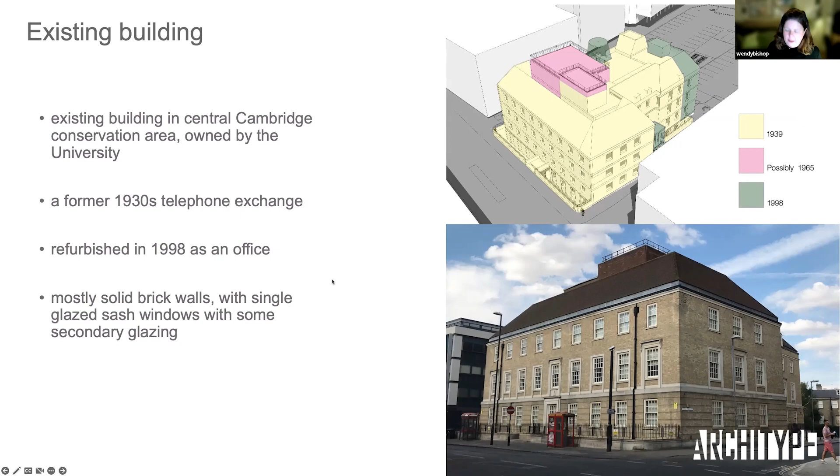And there was a refurbishment done in the late 90s where they added a small extension, which is shown in green in the top right there, and the entrance porch and possibly the escape stairs at the back. We're not entirely sure exactly what happened. And they occupied the building for about 20 years until they moved out in 2018 to their new offices. It's mostly solid brick walls, although there were some real surprises on site with single glazed sash windows with secondary glazing. And just an image of the building prior to any refurbishment going on.

I think one of the key things to note was the original, or actually they weren't original sash windows from the original 1939 build. They were rather clunky replacements from somewhere in between. With the secondary glazing and the dropped ceilings internally, it made the internal environment really quite gloomy. The overarching impression of walking around was that it really wasn't benefiting from daylight in most of the spaces.

So our brief from CISL, I mean, it was kind of a dream brief in many ways. We didn't have to convince anyone to upgrade it in any way. CISL were really clear they wanted a low carbon retrofit. It needs to be a case study for the circular economy. It should be done to Passivhaus standard, which in the case of refurbishment is obviously EnerPHit. They wanted it to be BREEAM outstanding, have low embodied carbon, showcase lots of innovations, include maximum bio-based materials, and also, and probably most importantly, to show that it could be done on a standard retrofit budget and offer value for money, because overall we wanted to show that this could be replicable in many locations.

And I'm just showing this graph to show the scale of the issue with the building. We did this within the first few weeks of the project. We had the meter readings for the last 12 months of Cambridge Assessment's occupation of the building. So the left-hand column is divided between gas and electricity. And we wanted to show the scale of change to bring it down to EnerPHit. And there's actually 3 levels of EnerPHit, EnerPHit Classic, and then another couple of levels with additional renewables added in. So there's a slight conversion factor there, the PER factor.

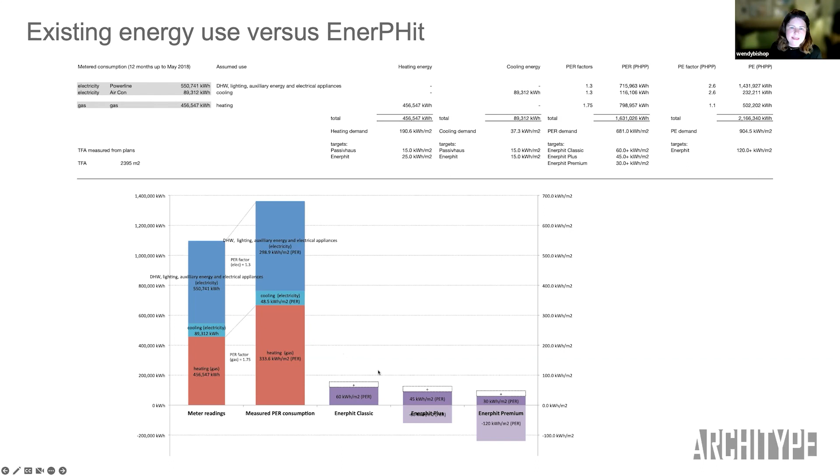So how do we start the project? This is one of our initial strategy drawings from when we were thinking about how we're going to tackle this. I've mentioned the conservation area, and obviously, although external wall insulation to upgrade the building's thermal performance would have been technically easier, we recognised right from the outset that it would have been a bit of a no-go in this context.

So we were looking at internally insulating, and that's what that red line all the way around the perimeter of the building represents. What that presents is some real challenges, actually, because with an existing building, you don't have the opportunity to construct details like structural walls coming down and meeting the lowest ground floor in a thermally efficient way. So we always knew we were going to have to tackle quite a number of thermal bridges,

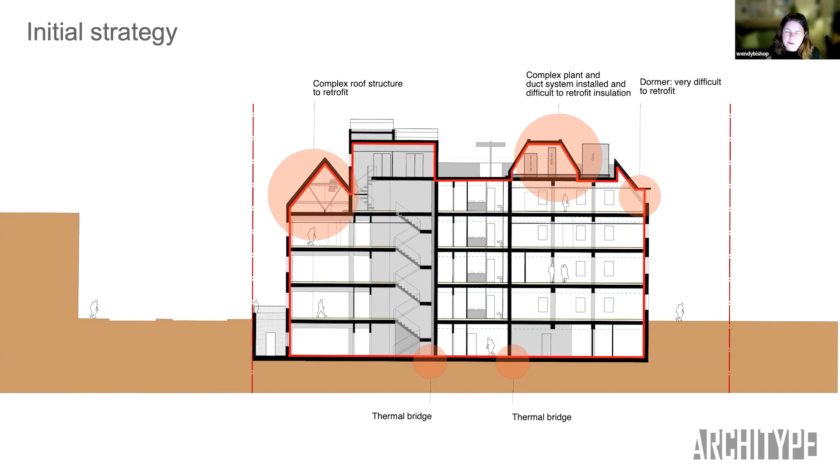both where walls met the lowest floor, also where every intermediate floor met the external walls, and also a lot of challenges around the very complicated roof line. So we were also looking at trying to simplify that roof line as much as possible in what we did.

And then another couple of sketches from that early stage, just elaborating on those principles. So the existing situation is illustrated in that top section, a typical floor plate with those lowered ceilings that I flagged up in the photo, which concealed a number of air conditioning units. We had a raised access floor that we would obviously go on to retain.

But looking at that proposed section at the bottom of the sheet, this shows that strategy of the internal wall insulation, and where we were going to be meeting intermediate floors, we knew we were going to need to wrap things around both above and below that to minimise the thermal bridge. And then when we came to the windows, we knew we need to upgrade those probably to a triple glazed window to meet the thermal comfort requirements of EnerPHit.

But in doing so, as well as changing the windows, we knew we would want to move them back in the facade so that they were ideally in line with that internal wall insulation. So we had as simple a detail as possible and continuity around the building. If we were to keep them out in their original position, we'd have had a very complicated detail at every single window to push the insulation and airtightness line out and then come back in again. So that was really a key change as well.

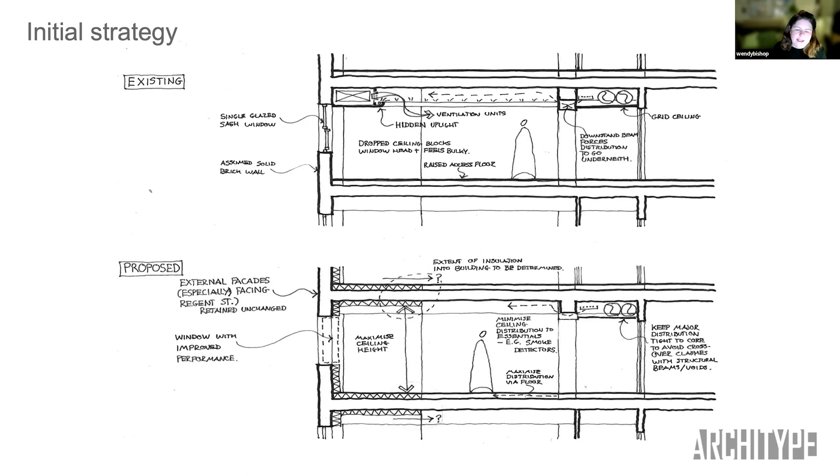And we had an initial meeting with the planners at quite an early stage to talk about the proposals for the building. And obviously, with the internal wall insulation, there was relatively little change externally. The big thing was to the windows, where we were proposing removing the sash windows and replacing them with windows without any subdivisions, mullions, transoms. So something like on the right-hand side, and planners flagged their concern at that stage that that was going to be a potentially contentious issue in this context because of the conservation area.

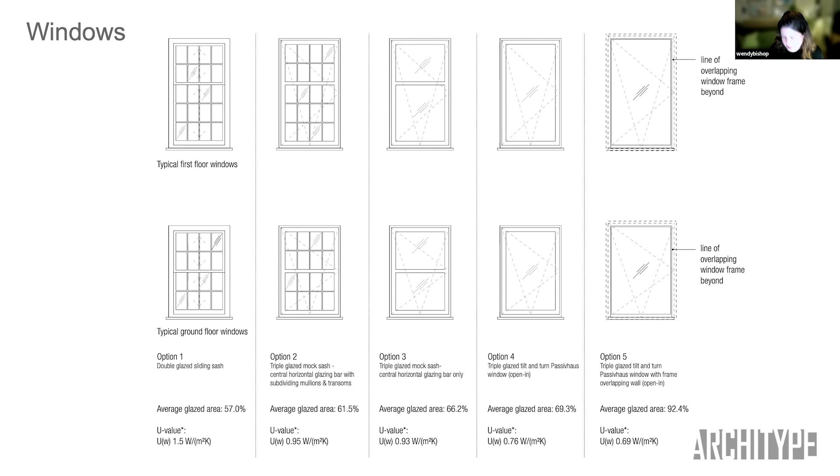So we spent a lot of time looking at this in detail through the early design stages. We looked at lots of different options, this illustrating a range of options that we looked at. And we tested those in different ways. So apologies for the slight graininess of that slide. In terms of the heating demand, obviously, as we moved from, I think it was a double glazed option for option one, all the rest are triple glazed.

But the thermal performance of glass is far better than the thermal performance of even a thermally broken window frame. So the less frame, the better the thermal performance. But several of those options could have met the EnerPHit criteria. But what really shocked us in a way was the impact on the daylight factor of removing all the sash bars and just maximising the amount of glass, and that massively increased the daylight getting into the building.

Despite that, and this was modelling that BDP did of the building with the different window options, even with the best possible windows with recessed frames and maximum glass, we still wouldn't have been able to achieve any BREEAM credits for daylighting because the daylight factor was still relatively poor. And I think it's probably an indication that because the building was built as a telephone exchange, daylight was never high on anyone's priority at that point in time. And so if we were going to radically change it, we would have had to start knocking new windows in the facade, which again wasn't really an option in this context.

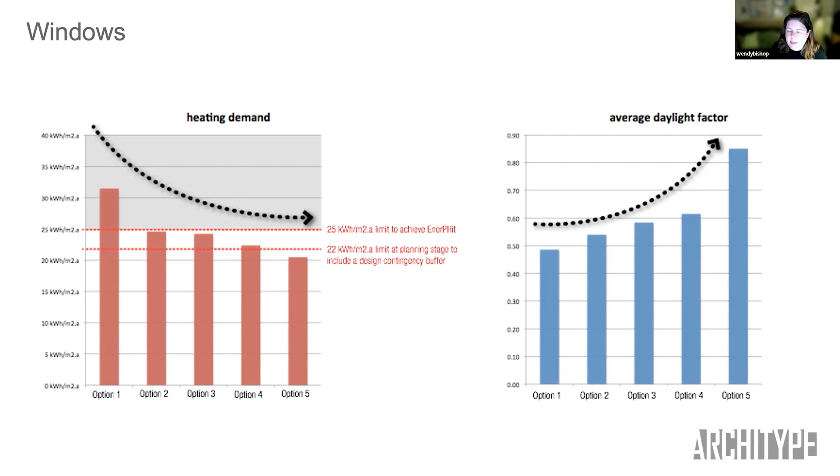So we put all these arguments to the planners, and fortunately they accepted it on grounds of sustainability. So although it was seen as being detrimental to the conservation area, the positive benefits to sustainability of making this change were felt to win out. Just some examples of the drawings that we did as part of that planning application to show that change.

Obviously, we can still open windows, particularly in mid-season conditions, but there'll be times in the winter as well as in the height of summer where we'll probably want to keep those windows closed to maintain comfort levels internally. Obviously, we had removed all the false ceilings from the building to maximise ceiling height and maximise daylight. And we were looking to cover those with an absorbent finish so that we were dealing with some of those acoustics within more open plan spaces.

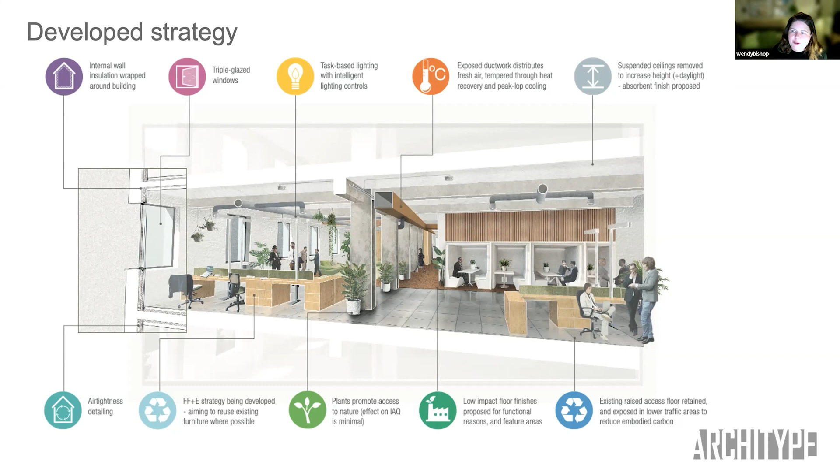And another key issue, which I think I've got a couple more slides on, is the floor finishes. So I talked about the raised access floor. Obviously, we kept that in the building. It was very useful to distribute power and data below the floor, but it also became a question about what should we finish the floor with. Actually, I'll come back to that in a second.

Just a quick one about this diagram around the circular economy, just to try and summarize the thinking around the building, because we'd seen lots of diagrams showing the completed circle around the circular economy, thinking about it from a material perspective. But this was trying to think about it from a building perspective or a project perspective. We have the existing building, of which we're retaining quite a significant chunk, obviously all the existing structure, and repurposing that where possible. So maximising that retained amount was really key.

Obviously, there were certain things we did need to remove from the building, like windows, partitions, and some of the floor finishes. And it was about trying to remove those as circularly as possible. So ideally, sending them off to be reused, I'm sure Peter will touch on that in a minute, or recycled if they couldn't be reused, and absolutely minimal materials being landfilled. And any new materials that we needed to bring in, and obviously there were quite a few of those, again, prioritising reuse, or if that wasn't available, recycled materials over any virgin materials as much as possible.

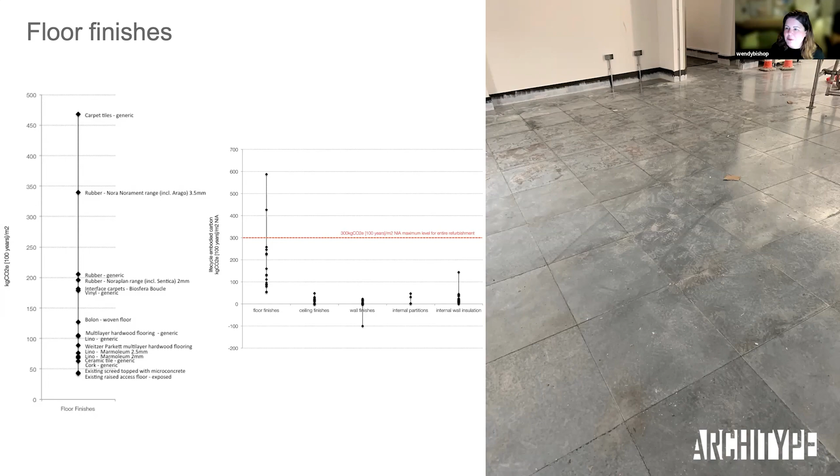Obviously within areas like toilets and kitchens, we have a different finish that's a bit more functional for those areas. But in some ways, doing the best thing here was actually to do nothing and try and just use what we had.

And then just to sum up, with some of the stats for the building, the embodied carbon assessment that we did at the end of the project to summarize what the building actually does. This is slightly different to others because we've assessed over a 100-year design life rather than a 60-year design life. So the in-use carbon is possibly slightly high. But obviously it's an existing building, we retained a lot of structure, so the upfront carbon is great. Over the whole life, it is higher than our original 300 kilogram CO2e per square metre target, but it was absolutely minimised.

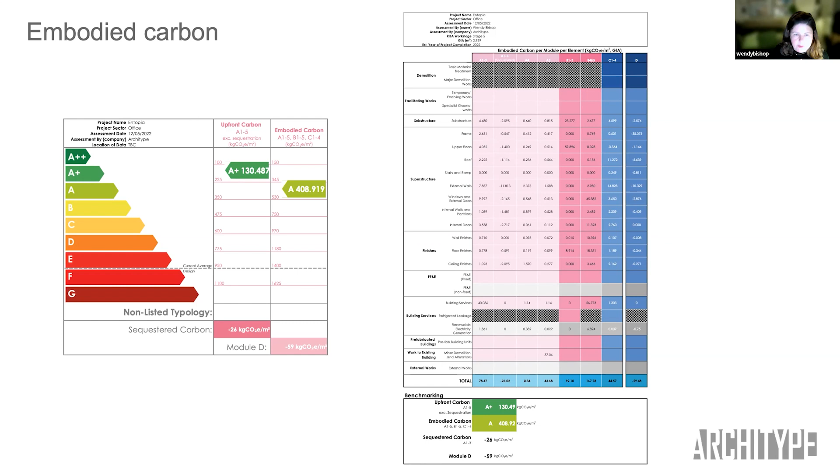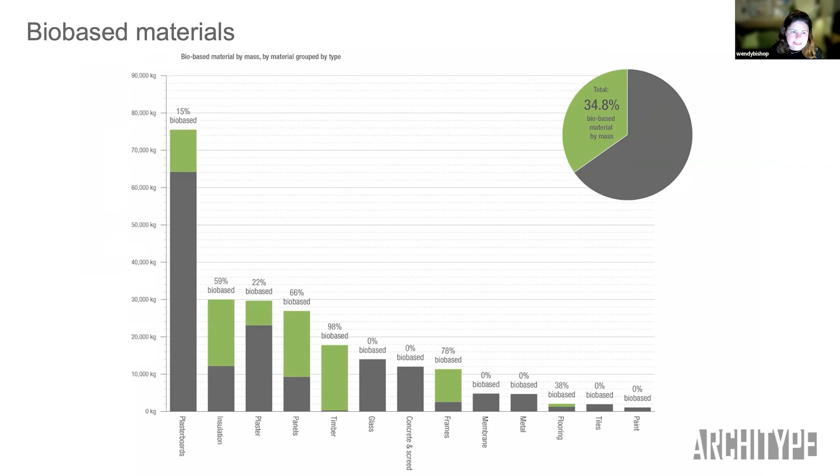We were set a target at the beginning of 70% bio-based materials, and this was really interesting because even when we initially looked at it, we realised it was going to be a very difficult percentage to meet, partly because it is a refurbishment rather than a new build. In a new build, you might have the opportunity to include a lot of structural timber, lots of mass to really increase that percentage, but in a refurb, we're quite limited in terms of the types of materials we're bringing in, and things like a window, although we have aluminium and timber composite window frames, the glass is always going to be non-bio-based. So we ended up with a total of about 35% bio-based by mass.

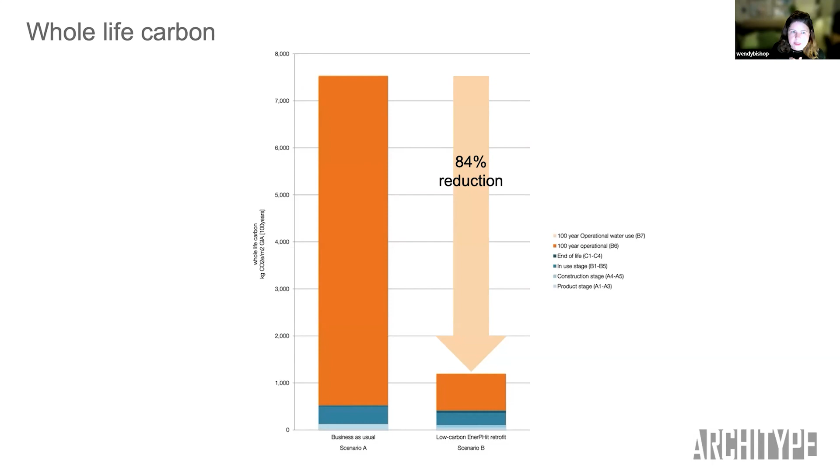And in terms of the whole life carbon, going back to that first graph, compared to a business as usual scenario with just a bog standard retrofit with no real energy saving measures, we've managed to save, we think, in excess of 80% whole life carbon, primarily through the reduction in operational energy, through achieving EnerPHit Classic, but also minimising the embodied carbon. And that's me. So I'll hand over to Lucy.

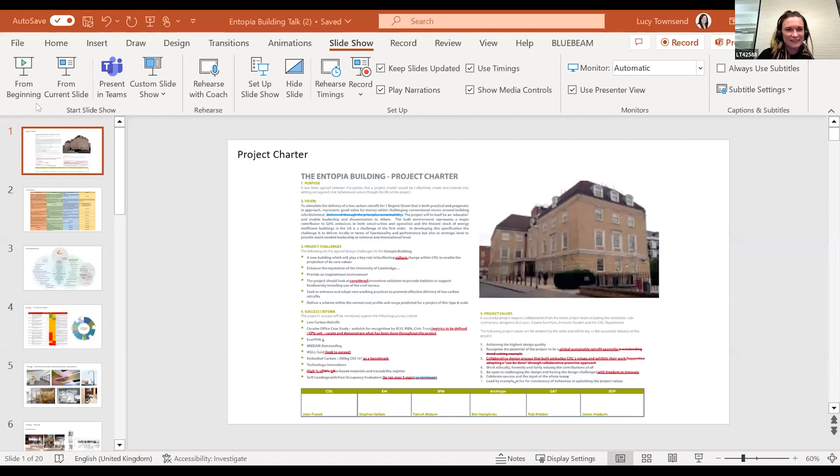Right, thanks, Wendy. So I'm just going to talk a bit more about the holistic sustainability approach that we took on the project, as well as the certifications. As Wendy mentioned, there was a very challenging sustainability brief, and as part of that, we were going for WELL and BREEAM certification, as well as EnerPHit. So I thought it was worth starting with this project charter that we had for the project. We know that we had all those brief requirements.

This was about bringing together all of the ambitions and aspirations for the project, and almost saying, okay, what does good look like? What is the success criteria we're going to be assessing this project on, but also not just about those outcomes, but about the process of how we get there. Right from the start, it was very important as a team, as well as for the client, that everyone worked together collaboratively on this project. And as part of that, we all signed up to this project charter.

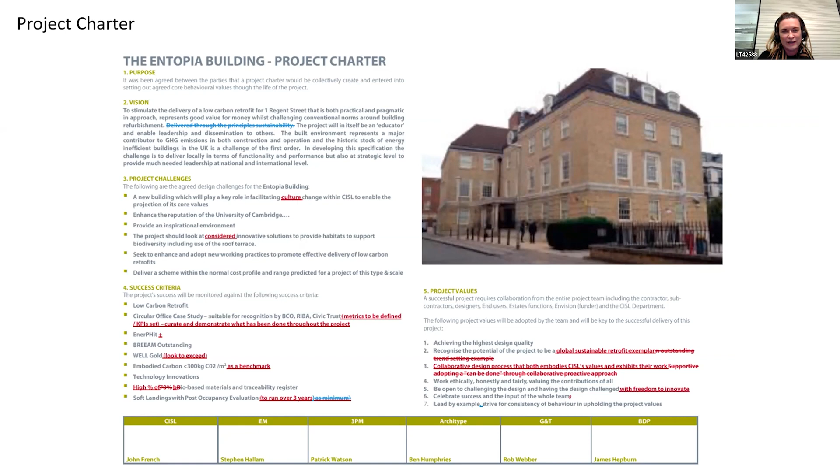So as you can see at the bottom there, that was all the different members of the team that were there from day one, and the leads of those teams all signed up to say, yes, we are all committed as a team, project team and client team, to deliver these ambitions for the project, which was, I think, really good, and just set ourselves in good stead to make sure we delivered on what we were trying to do.

And so just touching a bit on the certification. So as I said at the beginning, when we were discussing setting the brief, we talked about, okay, we don't just want to do some kind of tick box exercises when it comes to these certifications, but we did want a way of being able to measure the performance of this building. As Wendy said, we wanted this to be replicable, and we wanted this to be a blueprint for other projects. So to do that, we wanted to be able to measure the performance and actually have a badge that said that we had achieved something really good.

So we looked at BREEAM because obviously there would be a planning requirement, and it's just something that's well known in the UK as an environmental assessment methodology. WELL was probably still fairly new when we started talking about this 3 or 4 years ago, but it was growing in prominence for especially office developments. So that was all about focusing on the health and well-being of the occupants within the building, and that actually aligned quite well with EnerPHit, because that's not just about low energy. That's also about providing exemplar comfort for the users of that building.

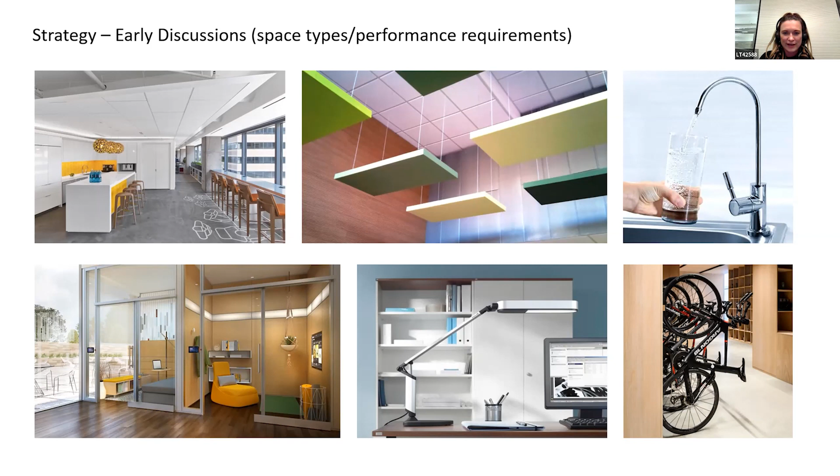And then I won't go too much into detail of this. This was kind of picking up on Wendy's point. So materiality was a really big part of the design decisions that we were making. And that was because from an embodied carbon point of view, for the fit out element, because obviously the majority of the structure and facade was getting retained, the materials that were going in as part of the fit out were a massive contributor to the embodied carbon in terms of proportion and percentage.

So it was really about how we can look at maximising the use of low embodied carbon materials, but also looking at, do we need these materials? Where can we actually omit materials? Because that is the best way of reducing your embodied carbon, by just not having any of those materials in there.

And this is something that I think over the lifespan of the project, it's been really good to see just what different materials are out there. And this is one that we've used, especially at BDP, on future projects, of going, oh, actually, I think we looked at this on CISL. In 3 years, has it been tested on other projects?

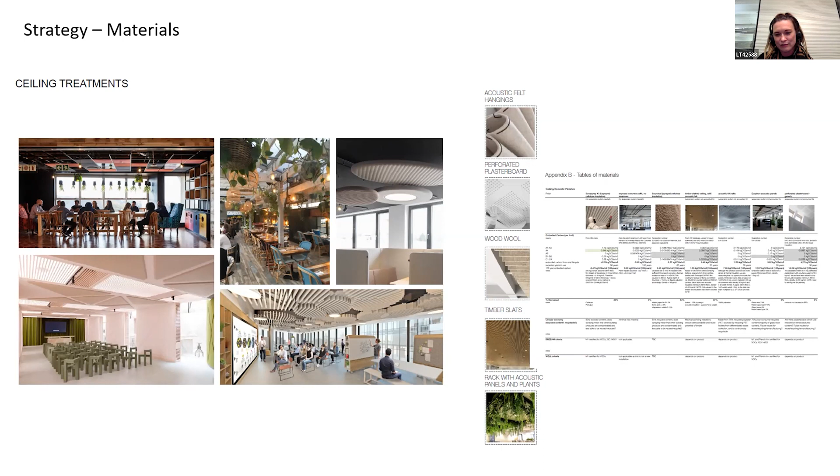Cost was a big thing as well, because if you're using materials that aren't necessarily typical construction materials, they tend to have a higher cost. So it's just looking at where the industry is evolving, and there's lots of databases now coming online with low embodied or high bio-based material options that architects and interior designers can start to use.

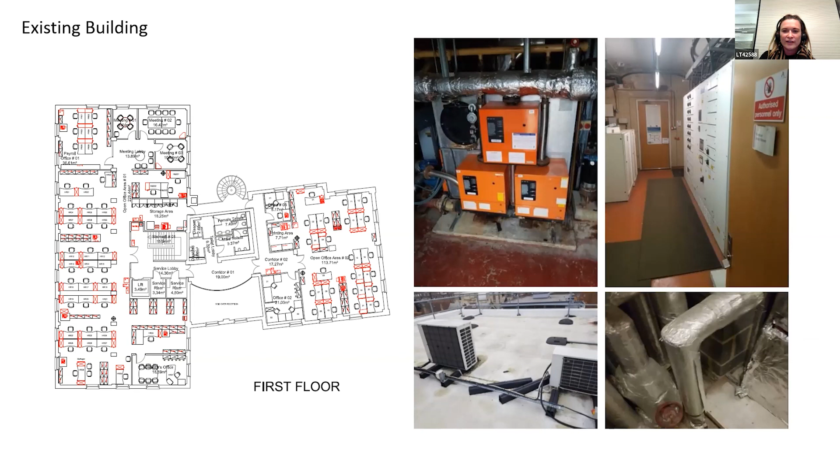And then just touching a bit on the services as well, because I know Wendy was talking a lot about the architecture. So one of the things we did was look at the existing building in terms of what kind of kit was in there and what was the existing engineering strategy. So we did walkarounds of the building to have a look at that. And then we started to look at, okay, is there anything we can actually reuse?

So just like the floor finishes, are there any bits of engineering kit in there? Because, as I mentioned before, the structure and facade were getting retained, the fit out materials, but then also the MEP was quite a large embodied carbon factor, because we were changing the heating and cooling strategy, and that obviously required new kit going in.

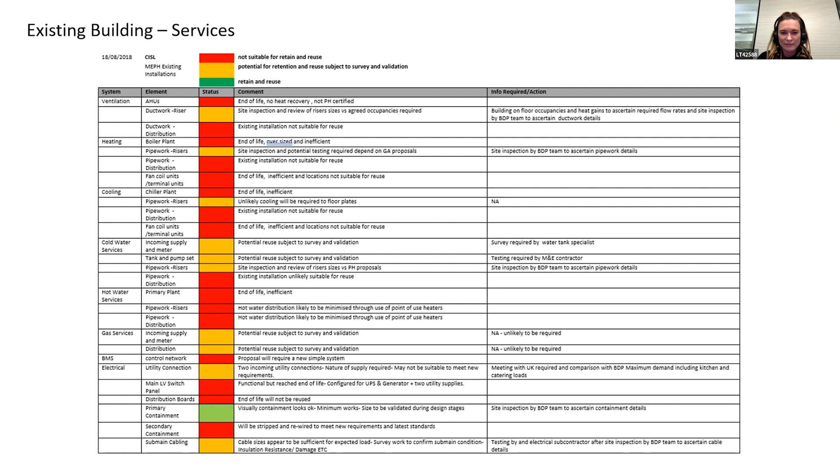So we just started to look at, is there anything that there's potential for retention and reuse, or looking around and going, actually, yes, we could definitely reuse that in the existing building so that we wouldn't have to go for a new high carbon option.

And then one of the brief requirements was decarbonising, so taking out the requirement for gas within this building, so having an all electric building. And this was where the engineering and the architectural strategies really needed to be intertwined, because it was all about, okay, if we create a thermally efficient and airtight building, that means using an air source heat pump strategy would be a lot more effective, and that would allow us to have this all electric strategy and have no combustion on site.

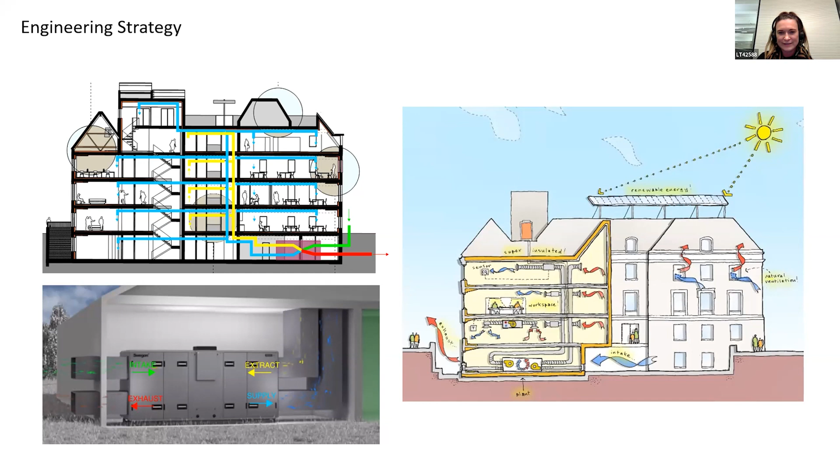We also looked in quite some detail at the thermal comfort. So one of the aspects of driving down the energy demand was looking at, can we bring in natural ventilation and cooling where possible? So this was about what times of the year. We did lots of modelling and studies to look at what times of the year the windows could be open, knowing that probably in the peak summer months there would need to be some elements of cooling, but it was almost trying to just eke out and maximise the amount of time you could get some of that natural cooling into the building.

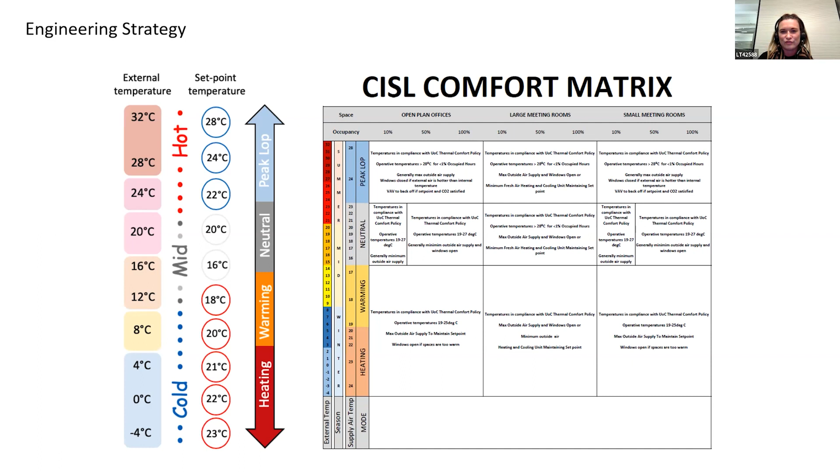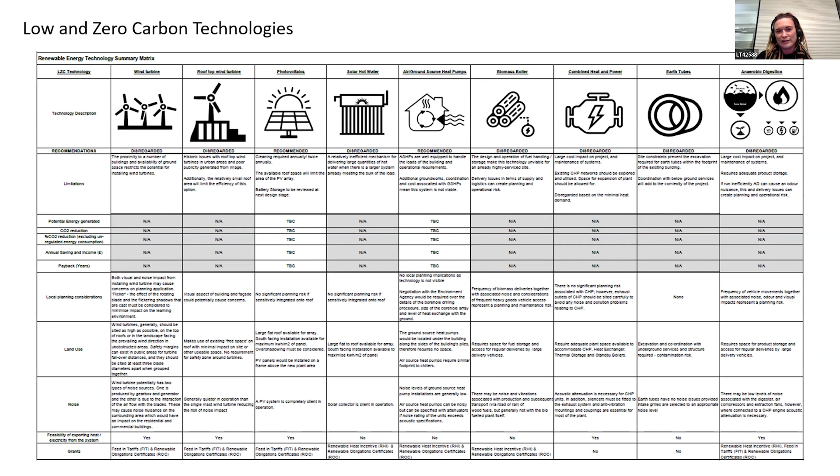And then supplementing the air source heat pumps, we wanted to look at, were there other technologies we could look at from a low and zero carbon perspective? So having available roof space was really important, and CISL wanted to have a usable roof terrace for entertaining and events. But what we were able to do was create a PV canopy structure, because we said, well, actually, it seems a waste to have that roof that you can't then generate some electricity from. So we did also look at putting PV, which was in the final building, and that just then helped to generate some additional renewable technologies on top of the fact it was already a low energy demand building from the EnerPHit certification.

And then, we had that project charter at the start, but it was making sure that this thread of high sustainability aspirations continued all the way through, not just the design, but then didn't get lost in the tender process and through to the contractor as well. So we had a great contractor team with ISG, and we made sure that as part of the employer's requirements and tender documents, all of these sustainability requirements were captured, so that ISG were given a footing of what was expected from the project, and making sure that things weren't changed from that design process or value engineered out, so that we could maintain that high aspiration.

And then just finally, on the outcomes, we have achieved BREEAM Outstanding at design stage. We are just looking at completing the post-construction stage, but it's on track for BREEAM Outstanding. And as part of that, we did get an innovation point for circular economy, which Peter Kelly will talk more about, which was really good, because the BRE don't tend to give out innovation points very lightly. We're also on track for WELL as well. So we are just finalising testing and getting the last bits of documentation together for that.

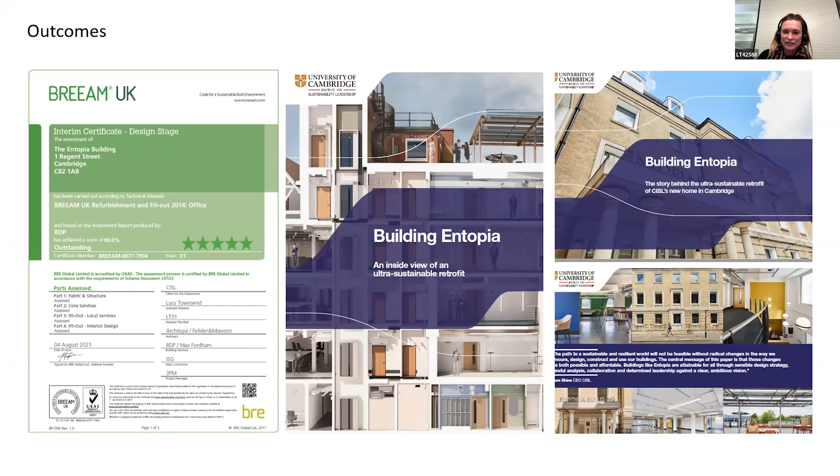And then these two images, the two right images, are the Entopia case study. So everyone within the team and within CISL have produced a summary document and a more detailed document that talks about the process we went through, some of the key achievements for the project, as well as some of the challenges. So if you can share the link, it's definitely worth a read if you haven't seen that case study.

And then just finally, the highlight for me for the project. So the now King Charles, who was Prince at the time, kindly came and looked around the building and officially opened the building. So this was me just talking him through what the aspirations were and what we did. He did have a couple of comments on the floor finish of where the carpets were going to go down, but I think we convinced him that the exposed floor finish was good, and he seemed really receptive and really pleased with what we were doing for this project, and hopeful that we could use this for future projects going forward. So that was really nice, and hopefully a picture I'll keep on my mantelpiece for years to come.

And that was me. Thank you. Brilliant. Thank you very much, Lucy. I believe we're going to go straight into Peter Kelly's presentation. Are you there, Peter? I'm here, yes. Thank you. I'll share my screen just in case I crash again, which is probably lucky for most on the call anyway, but let's see if this works. Can you see that? Yep, that looks good. Thanks.

Excellent, thank you. Okay, so before I go into a bit more detail on the circular economy aspects, I just wanted to touch a little bit on some of the challenges we faced when we started doing the construction piece. So one of the key outcomes from this is to strip back the building first, because you just never know on these types of buildings what you're going to find. And one of the things that we really didn't expect to find was a heating trench, particularly on the first, second and third floor perimeters.

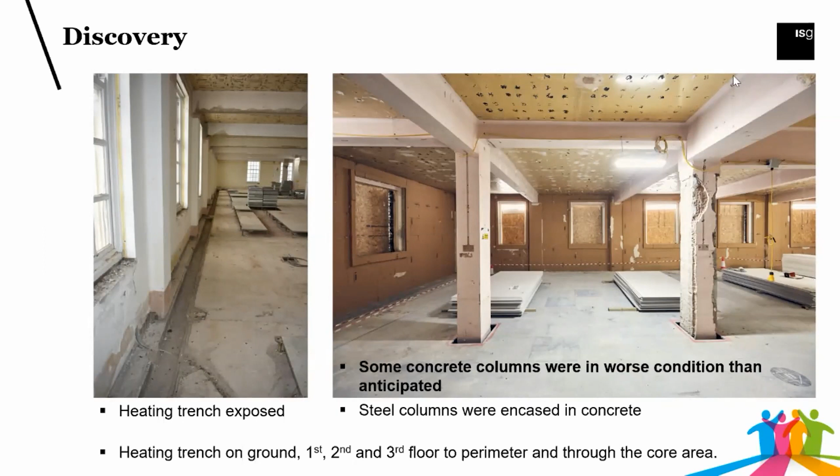I'm not going to read this all out, but I'm sure the slides will be distributed afterwards, so I left the detail there. But I think it's been mentioned a couple of times, some quite unique materials, certainly not used on this scale of project before, definitely for diathonite anyway. So we had to do a lot of testing,

a lot of mock-ups to make sure that everybody was confident that these solutions would work, and that the installation of these solutions was correct by the subcontractors, because these are quite specialist subcontractors, but they were excellent and worked really well with our existing fit-out contractor and taught some of their operatives how to apply these products so that they could be applied by more than just themselves in the future to broaden the use of these materials.

So again, the bio-based aspect of this. The SonaSpray, I can't recommend it highly enough, particularly for raised access floors. We thought acoustics would be an issue, but the SonaSpray does such a good job of dampening that sound. So some really good materials.

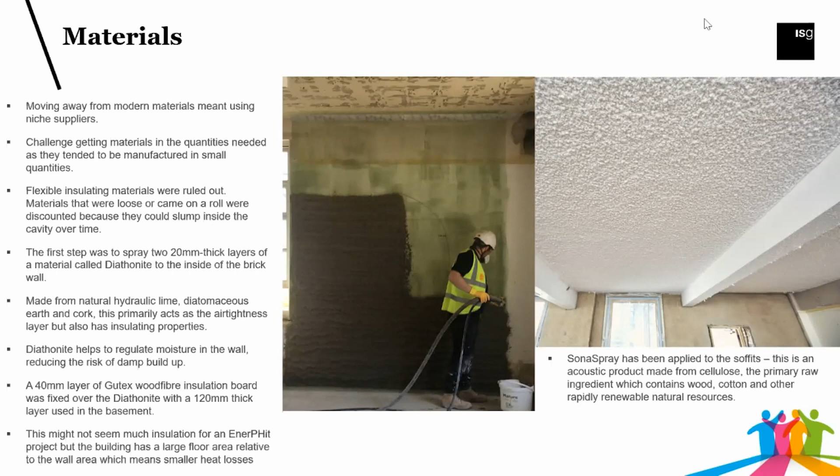Typically, if we hadn't hit COVID, they would have been easier to source. But once we hit COVID, that put us in delay. And then, of course, we hit wonderful Brexit, which meant that as largely these materials are European, we had trouble getting them to site on time. So a couple of issues that hopefully, in use of these materials in the future, wouldn't occur, because hopefully there won't be another COVID, and hopefully there certainly won't be the implications of Brexit at that time as well.

So it's very difficult, obviously, to pick that out on a 2D drawing, and much better if we could visualize that for everybody to agree, and then with our supply chain to make sure when they're doing the mock-ups in particular, we got that right, and then they could carry on throughout the floors and make sure that all the different types of installation and materials, etc., were correct. So as you can imagine, lots of hold points, lots of quality control, etc., to make sure that everybody remembered the correct detail and the right installation sequence.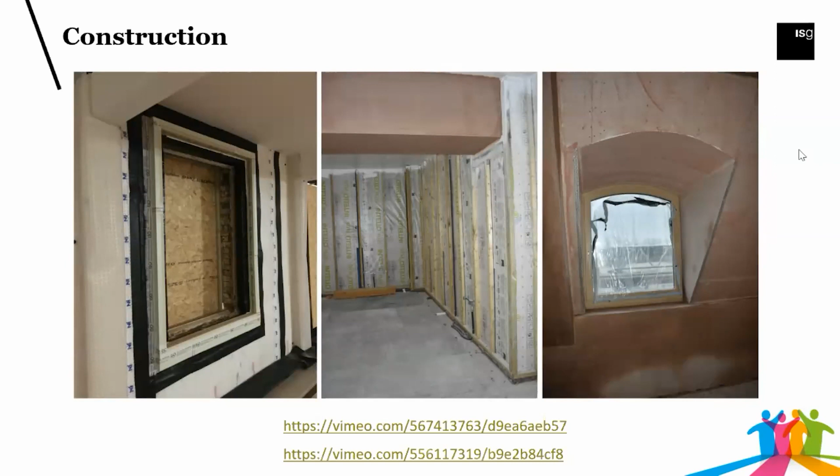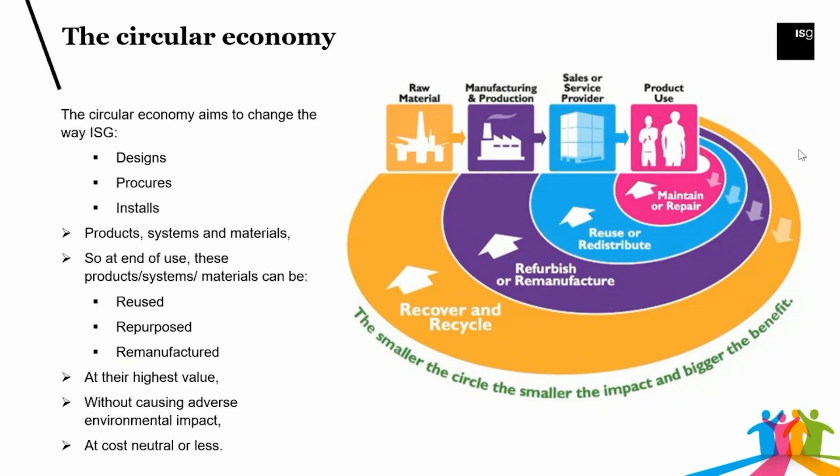So moving on to the circular economy aspirations, we have our own circular economy policy, which aims to change the way we design, procure and install materials, etc., so that they can be reused, repurposed and remanufactured at their end of life or end of use, hopefully at their highest value without causing adverse environmental impact, at cost neutral or less. And this project was an exemplar for that. I'm going to start with some of the reuse of the materials that we managed to implement here.

But what's really important is clarity around what you need when you're going to reuse materials on this scale. You need a donor site. You need the logistics on that donor site to be able to carefully take those materials down, palletize them, store them in an appropriate place, and then hopefully transport them. Then you need a storage facility, which particularly in and around London and the southeast Cambridge area is quite expensive.

Then you need a platform that allows somebody to advertise that you've got those materials, so somebody may know that they're available for reuse. And then whoever's storing those materials needs the ability to redistribute them to wherever they're required for their onward reuse. So in this case, Lucy mentioned it, we got a 1% uplift in BREEAM for innovation points, where we removed circa 350 LED strip lighting from St. James's Place in London, which was a Cat A fit out we were fitting out for a client.

They obviously wanted to change that Cat A space into something different, but thankfully for once made sure that they put a requirement on us to reuse as much of that Cat A as possible. So fortuitous timing, which is always the case when it comes to reuse, that we were able to carefully remove those lights. As you can see, they're meant to be installed in a ceiling. We sent them via Collecteco, which is a company that specializes in this kind of reuse, back to their warehouse. We then managed to contact the original lighting manufacturer, Specials Lighting Design, who I asked if they would test and honor the warranty on these if we reinstalled them.

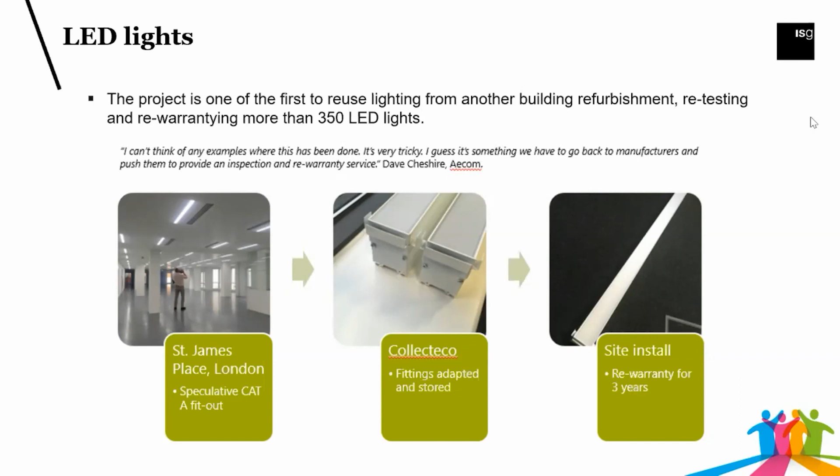They said they'd never done it before, but why not send them back to them? They knew exactly where they'd been installed and how long for. Cat A space, rarely used. And then we paid them to do some uplighting with some LED strip lighting and add some wires so we could hang them in the new CISL.

So you can see here, even though they're meant to be installed in the ceiling, they look really, really good. You would never know that they're secondhand in theory, although they were rarely used, as I said, in St. James's. For the whole look and feel of the CISL office, you can see how well they fit in. So absolutely delighted with that. And the BRE couldn't find a case where something like this had been done before, hence giving us that extra 1%.

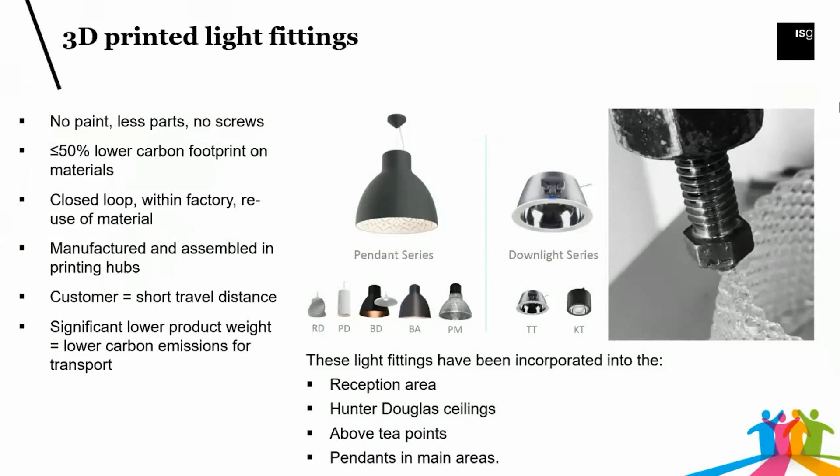Moving on, we managed to source some specialist lighting from Signify, the former Philips lighting. Again, I won't spend too long here, but basically these pendants can be reground down and reformed back into pendants, again up to 5 or 6 times. They're very low in embodied carbon, etc. So really good product, really innovative, and as you can see, look excellent now that the project's finished, and not just here in the reception area but in the kitchen areas, etc. as well. So we're really delighted with the installation of those.

I would note that there was a lighting design for CISL, but obviously when it came to stage 3, we pivoted away from the original lighting design and redesigned it to incorporate those lights from St James's and these lights from Signify.

Eternals movie. So again, I managed to source some steel which came originally from this movie. It was used as the rails to run the cameras on. When they'd finished shooting, it was about to go in a skip. Luckily, there was a gentleman called Charlie Law who was working there at the time, who I know well, who salvaged that steel and sent it for reuse to a company called Cleveland Steel.

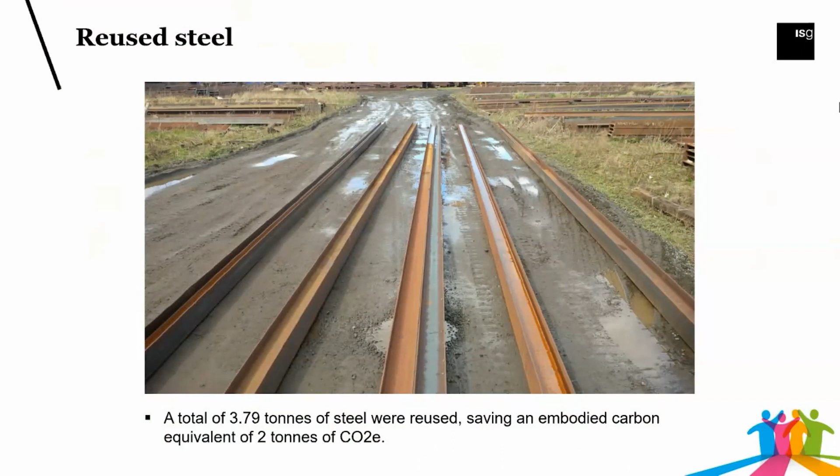I know Roy well at Cleveland, so I rang him up and said, I don't suppose you've got any appropriate steel for our PV canopy? And he said, well, funnily enough, I just had a load promised to me. What do you need? So I managed to send him the steel sections we needed. He said he could make it work with a minor rejig of the design. That took about a couple of hours by our structural engineer. And you can see nice rusty steel here, reclaimed from the Marvel studio, that by the time was cut to size, galvanized, and brought to site at CISL and installed.

So the great thing about this is we had the original paperwork from Charlie that came from the studios that allowed the reuse protocol for steel to be enacted, meaning that the fabricator, the installation contractor that worked directly for us, ISG, could easily treat it as if it was brand new steel, and it didn't really matter to them whether it was secondhand or not. We had the requisite paperwork to take any risk or warranty issues or whatever it was away from them.

And then finally, we were doing the Netflix fit out in central London at the Copyright Building. Their security demands meant that they had to reconfigure the reception space. This beautiful piece of furniture had been only in for 6 or 7 years, designed by Piercy & Co. Absolutely top quality design in terms of its detailing. Also Bill Amberg leather that you can see on one of the pictures there. We managed to salvage that because it was going to go in the skip otherwise.

Luckily, Benchmark Joinery, who made it, were on our supply chain. They came in. It did take them a lot longer than they anticipated to remove it, and they acknowledged that they need to start designing their furniture for circularity and not for long-term installation. Unfortunately, the travertine top was broken, but we managed to salvage some of it. They did need to modify it anyway for CISL's requirements for wheelchair access.

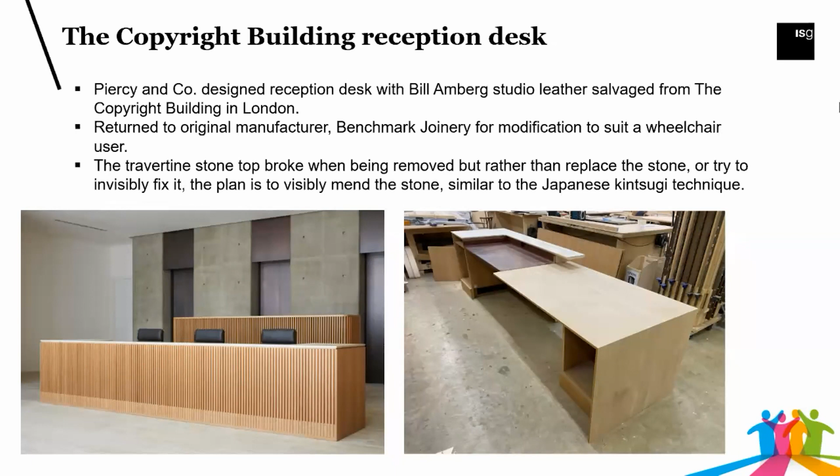So it all worked out pretty well in the end, and you can see it here beautifully installed in the reception area of CISL. So that was a real plus point and really sets off that reception area. I just want to give a brief shout out to the UK GBC System Enablers report, which was launched last week. I was part of that team that reviewed it, and we think it's a really good piece of work. So in terms of some of those enablers that are very specific to construction, I think we've got a long way to go.

The materials market doesn't really exist and is not mature enough. We're not doing enough circular economy audits to identify materials for reuse. We haven't got agreed metrics around what we should measure and monitor. And then we're still designing for manufacturing and assembly, but not disassembly. And there's a lot of thinking around materials passporting, but again, it's not widely undertaken. So a lot of work to do in this space if we're really going to change how we work in terms of circular economy.

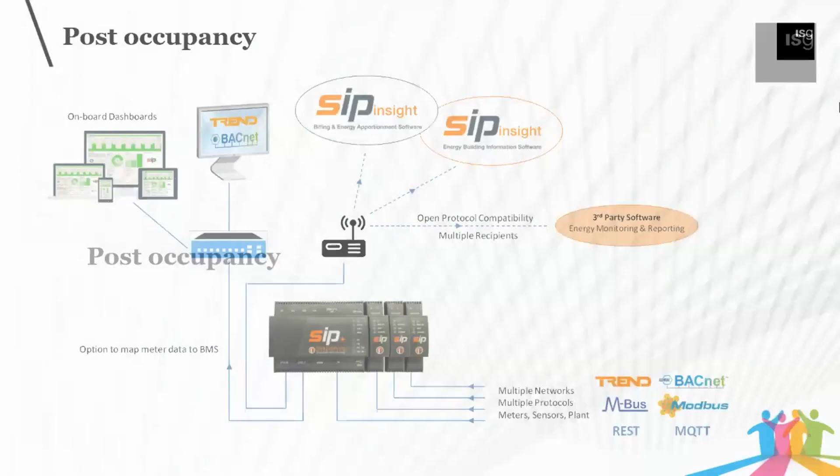So just a brief slide on post-occupancy, which is going to be a huge part of this project. We're contractually obliged to stay for a considerable amount of time and make sure that this building is working correctly and as designed. We've got some really good kit installed to almost bypass the BMS and go straight to some software that allowed us to monitor all the sub-metering. As you can imagine, in this building, it's sub-metered to death. So we're really able to pick up very closely the energy consumption and make sure we're on track. So we're really looking forward to getting that post-occupancy really in swing. And then I'm sure there'll be more publications in due course about how the building's performing.

So just to wrap up, we really feel that these deep green retrofits can be done. There is a report on the CISL website that talks about the costings, so well worth a download and a read through. Once you take out issues that wouldn't ordinarily land again, like Brexit and like COVID, then we're very much within the range for a standard retrofit. The standard materials you buy off the shelf won't cut the mustard if you're looking at the sustainability aspirations that were on this project around bio-based, managing to be in line with WUFI monitoring, modeling, etc. So it's a challenge, but we must use more of these types of materials and make sure that they become more frequently used.

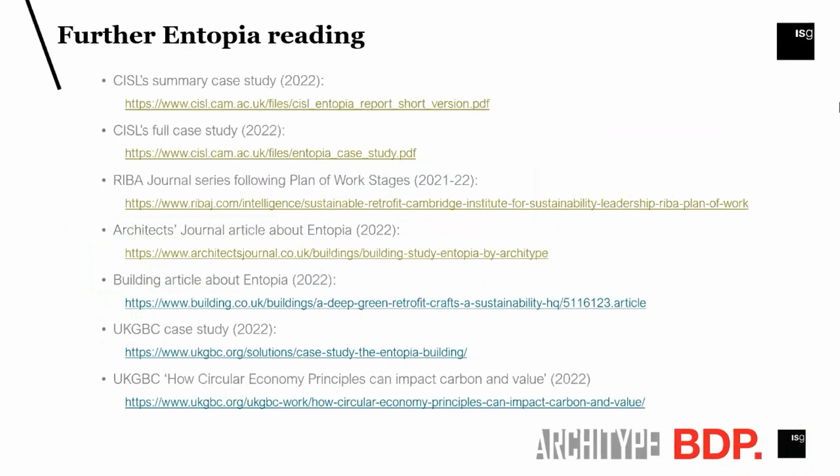So as was mentioned, there's been lots of publications. We'll distribute the slides, obviously, and there's plenty out there in a lot more detail than we've covered today. So please help yourself if you're interested, and there'll be much more to come as we learn more about the building operating going forward. So that's it. I'll stop sharing now and we'll welcome any questions.